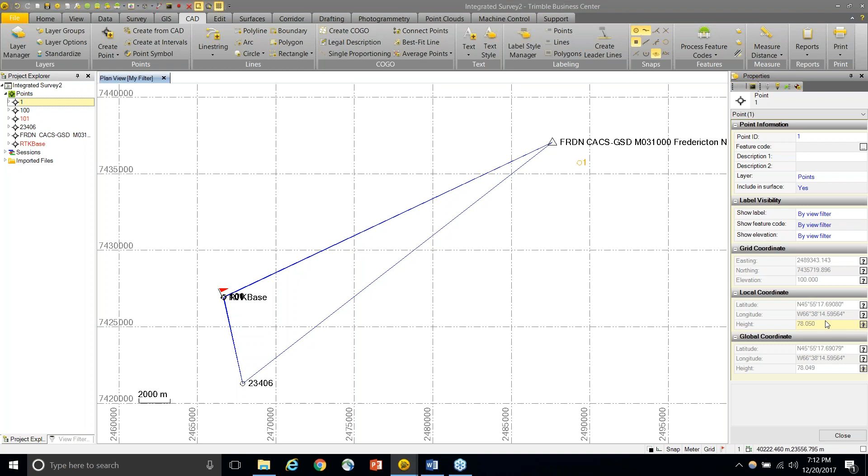And that creates a point, but notice if I select that point here on the left-hand side, it also has global and local coordinates, even though I only specified grid coordinates, and that is because we are currently working in a coordinate system that is tied to a horizontal and vertical datum. So that's one way, and I can do vice versa.

I can also add a global coordinate instead to this point, so I could right-click on the point, for instance, and hit add coordinate, and that's a nifty little tool. And I could also add this global coordinate to that as well, if necessary. And one other little tip for you before we finish up this question.

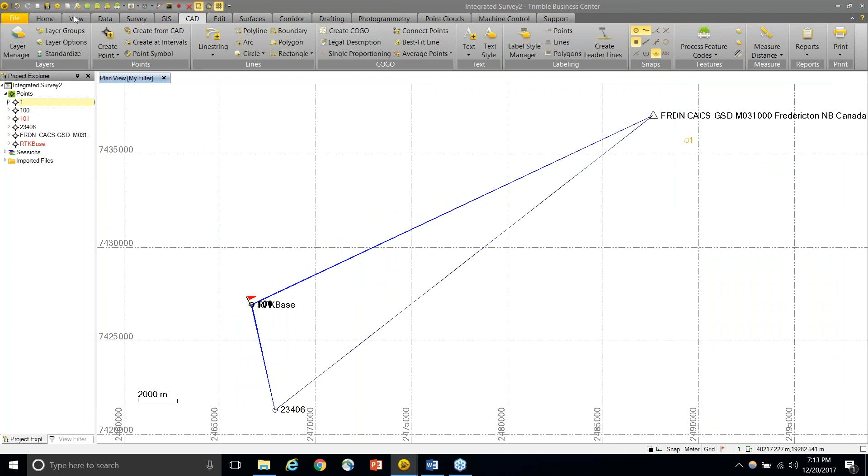You can view all of the local, global, and grid coordinates of your points by going to the point spreadsheet, which is under the View tab here, and hitting Points. Boom, there you've got a list of all the points in your drawing with the latitude, longitude, and height. Let's say I wanted to add the grid coordinates here.

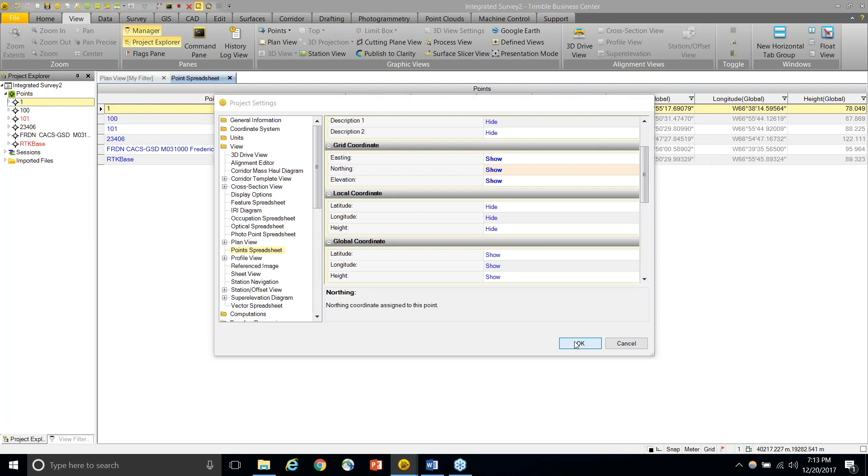I can go to the project settings, and we'll go to the left-hand side. There's a View tab, and under there, there's a point spreadsheet. And in that, we can change the settings for what's shown in the point spreadsheet. So if I scroll down, there's grid coordinates. So far they're set to hide, so we'll quickly change that to show. And now when we hit OK, it shows easting, northing, elevation, latitude, longitude, and height. So a lot of information for what you can use, and hopefully that answers the question.

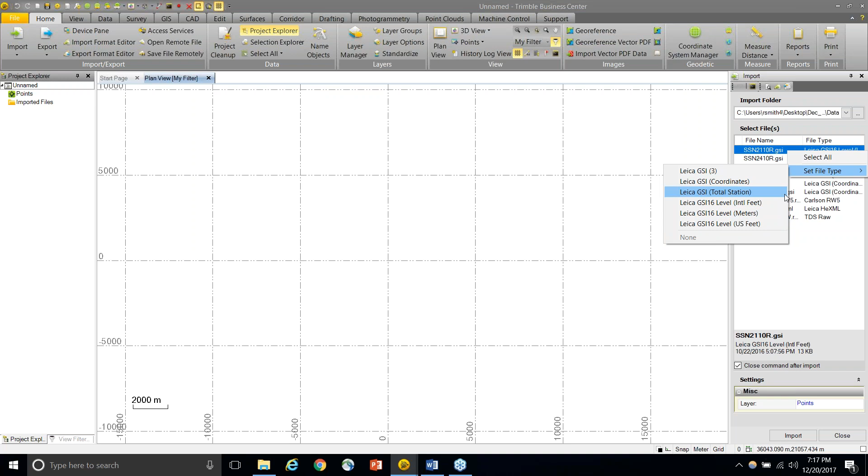So quick example of this, we'll import this Leica GSI total station data. And we'll hit import, and then we'll bring up all the total station data inside that. There we go. And voila. So we have a bunch of total station observations here. And like any data you would expect to get from a Trimble instrument, like from a job file or a JXL file, it has the same raw data properties.

So if we look at the right-hand side, for a total station observation, it's got the instrument height, as well as prism information and raw target height. Notice though that the prism constant isn't filled out. For this specific file format, and this is something to be aware of for anyone importing non-Trimble data into TBC, some raw data formats don't hold all of the information that a Trimble raw data file format can support.

So it's important to know that when importing that data into TBC, and this is where good field notes come into play, of knowing what your prism constants were that you used in the field, and you can input that data here and it will update. So be aware of that when importing data into TBC, because that has the potential to be an issue for you if you're missing raw data that you thought you might get from an instrument.

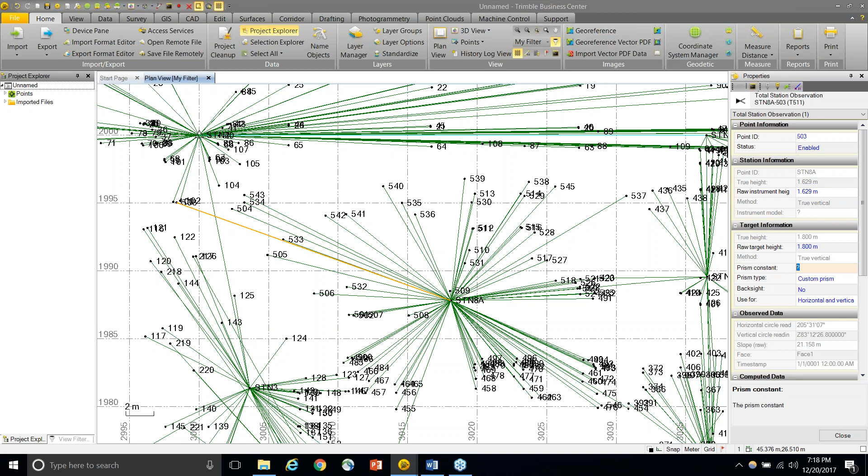So we've got all that, and you can use the same functionality that you would with any other Trimble data, such as total station traverse adjustment, as well as I'll show a little network adjustment here just for example's sake. So I'll fix a minimally constrained adjustment here with 1 point, and we'll quickly look here on the GSI file. There's several stations, and I'm just going to open up the properties and turn on the corrections so the adjustment will run. And we'll go adjust.

Oh, looks like I missed a setting. Bear with me, technical difficulties. Sea level correction. All right, now we have all of those, and adjust. And now we have an adjustment performed, and you see the error ellipses around the station point, so I could click on one of those. We'll look at station 8A and see the error, and I could go from there and do a network adjustment report or any other information.

So the important thing to take away from here is we have a lot of support for various different types of non-Trimble formats, such as a GSI. And with that data, be aware of what is held in that raw data format and what you should expect to be imported in TBC. But at the same time, this gives you a benefit of importing not only Trimble data, but all those other types of raw data into one project, so you can carry out all of those processing needs in one software package. So excellent.

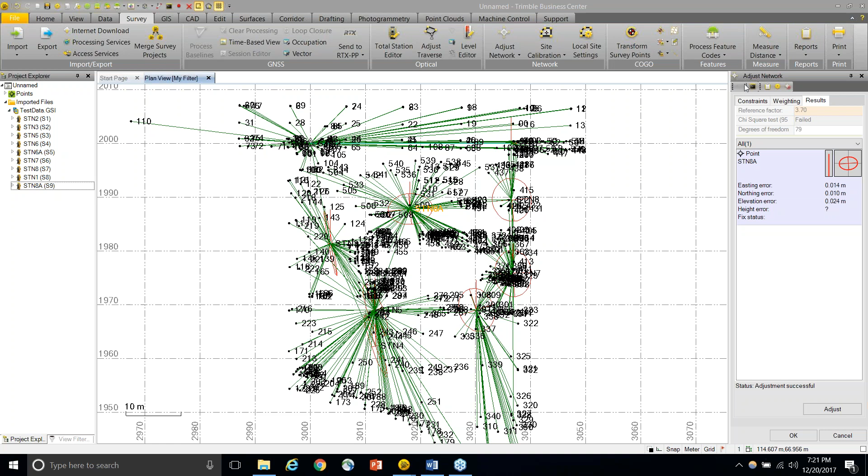So in addition to Trimble, what other softwares are you using in your day-to-day survey workflow? See if I can launch it here, Michael. Oh, you got it. So the five that we've identified: Autodesk, Bentley, Carlson, Microsurvey, or Leica. Please give us a response. We'd really appreciate it. We're always looking to become more interoperable with third-party software and hardware packages. Can they select more than one answer, Joe? Yeah, on this question, they can. Okay.

No questions, Riley. I think you didn't leave much to be asked. That was very good. Thank you, sir. No problem. Thanks for holding on here. Awesome. Thanks, guys. Thanks, Riley.

All right. Now that brings us to our first section of Two Truths and a Lie. The way this is going to work is one of us here, or Riley or Michael, will be reading a very short story or statement about TBC. Listen to all three, and then in the chat window, let us know what you think is the false statement. Please wait till all three of them are read. We had a little fun with it this morning. Hopefully you get a chuckle out of some of them. All right, first up, we're going to have Devin talk about Four Corners.

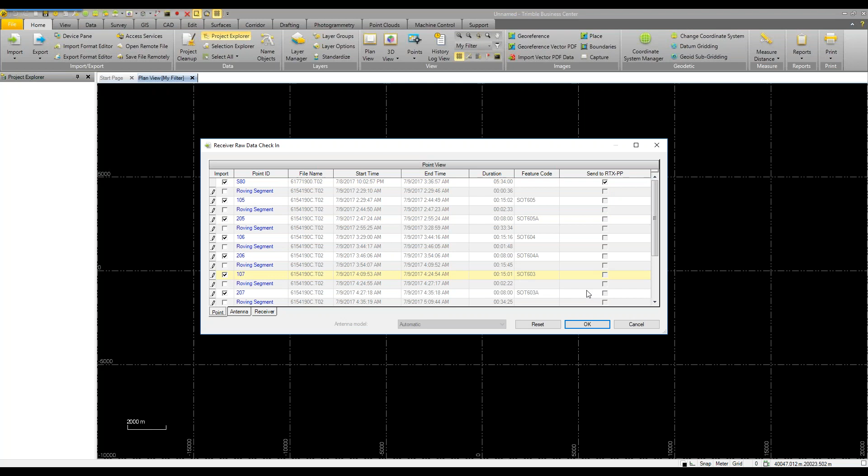Okay, so I'm going to start a new project in TBC. And I've got a few files here I need to import. Let's see. There it is. These two. Now, one of these is a base file. The other one is a rover file. And you can see here, the base was run for 5 hours, and I am going to send it to RTXPP to verify the position of the base.

Joe, you're not registered with RTXPP? Register now. This is a shortcut. It's a legit copy, I swear.

So what this is doing is basically sending a file similar to the OPUS service. It's sending it to a Trimble OPUS-like service called RTX post-processing. So in return, we are getting a solution back from the processing server. You could just drag that whole screen down, Terry. That's all right.

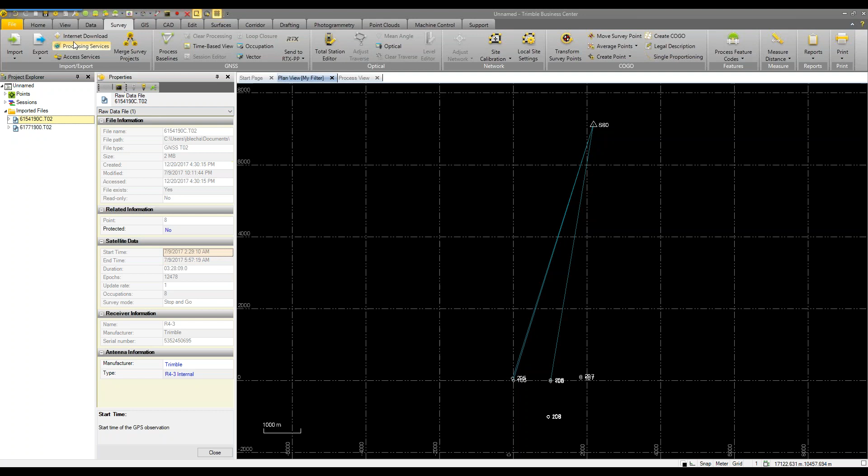In my years of experience with TBC, I've learned that having the properties pane next to the Project Explorer is a lot more useful than having it on the opposite side of the screen. There we go. So when I'm looking at something in the Project Explorer, the properties of it are right here, not on the other side of the screen. So we import our files, and this data was collected in July, so I'm going to import the final GPS.

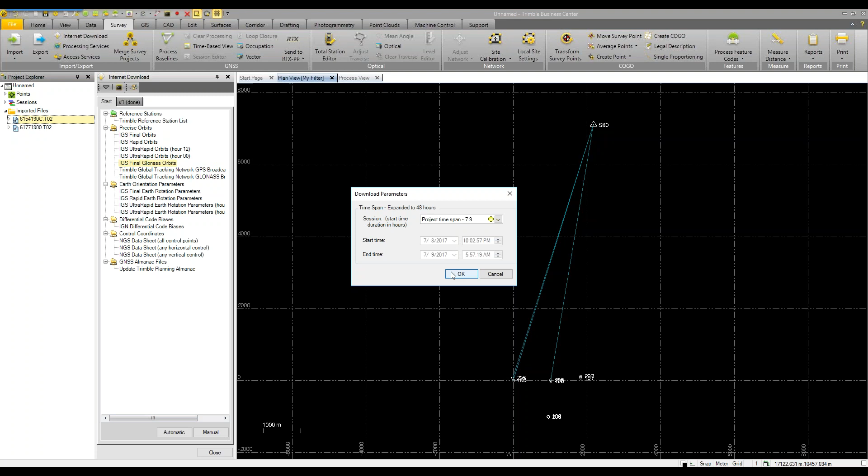The final GPS orbit and the GLONASS orbit. And just to make sure I have the most up-to-date data. And instead of having to click automatic, you can just double-click on this. What's the difference between automatic and manual, Terry? Manual will take you to the site, and I don't want to do that. It'll take you to the site, and you can manually find the files. Otherwise, it goes to the new server locations. You know, in TBC that's changed, and we had a patch to update them.

So now I imported the files. Here they are, the IGS and the IGL. IGS being GPS and L is the GLONASS. You get the properties on that, you can see it. So in my project settings, I want to check and see what we've got here.

How much time do I have? As much time as you need. Okay. You have that thing in... It's really low.

Okay, so I'm going to baseline processing, looking at general. My ephemeris type is automatic, so that means it's going to use the best ephemeris that I have. And right now, as you see, I've got the precise, so I'll just leave it at automatic, but I just want to make sure what it's set to. And really, all the default settings are going to be good enough for what we are doing. We have GPS and GLONASS in this.

So first, after importing all that, checking my settings, I'm going to go ahead and process the data and check the results. Now, this came from one of the TBC beta users. Submitted this question, so it's out of the country. So you can see all three of the vectors are floating in the high precision and horizontal vertical precision. So there's a problem, and somewhere, I'm not really quite sure where it is, but I was able to get these fixed, going through a number of processes to try to figure it out.

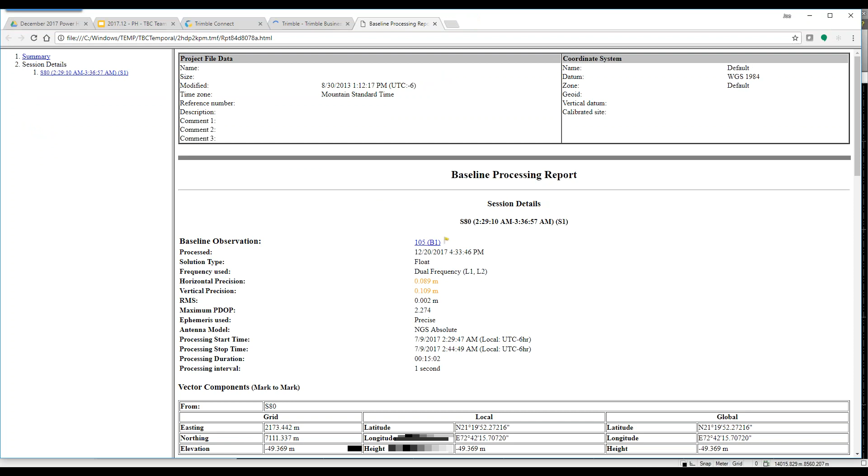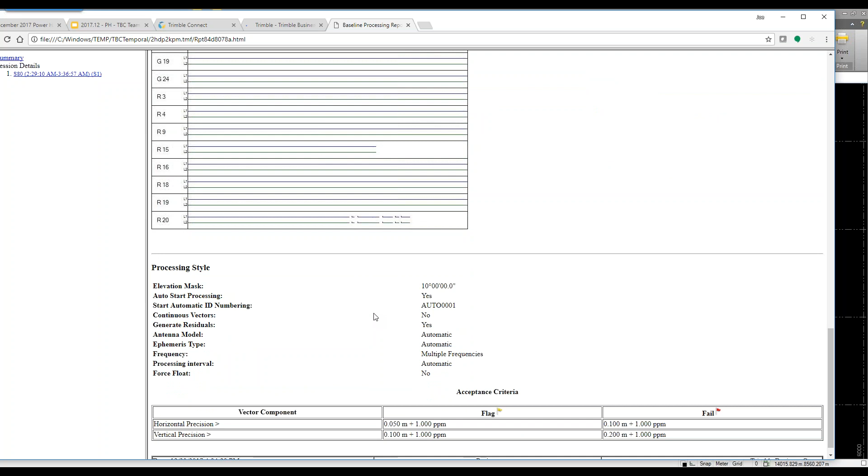So while I'm in here, let's look at just one of these points right now. And I'm going to select the point and then hit report. Hopefully you can see that. Okay. So we can see all this information of what information was used to process the data. It was float, so we didn't get any. We can see some breaks in the data on just one of the satellites. That really doesn't tell us much information, except that we do have a lot of satellites to look at. So let's minimize this. I'm going to just save that.

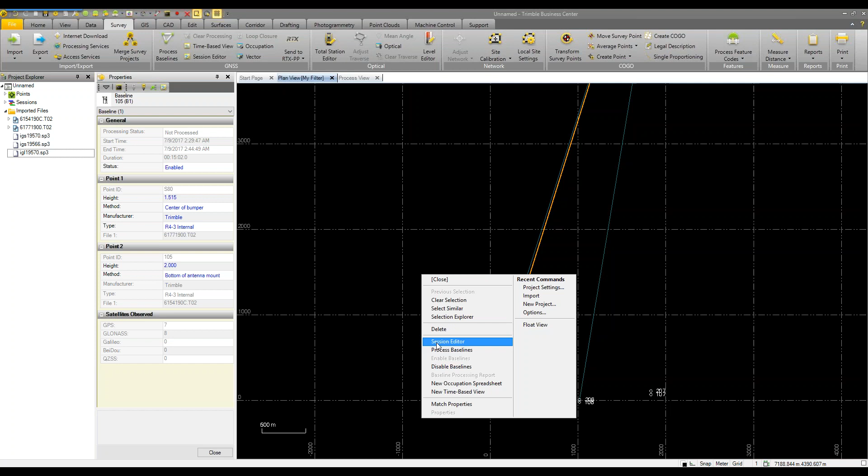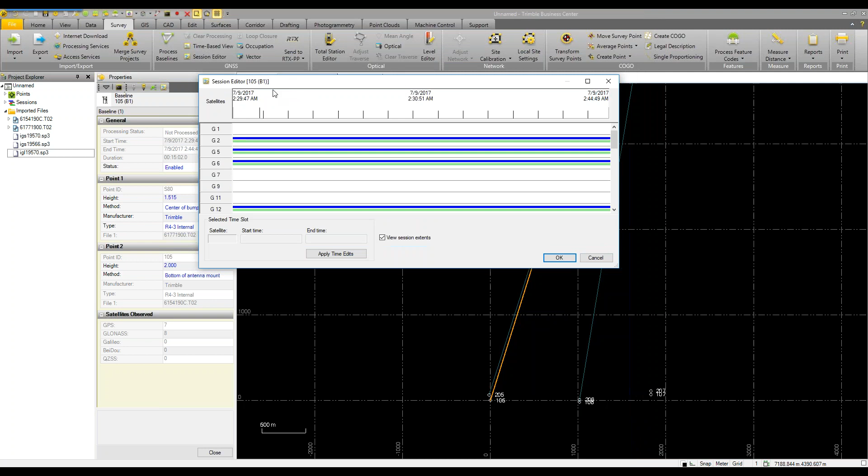And what I'm going to do, what point was that? Is that 105? I'm going to select that vector and look at the session editor. And you can see that because this is part of PPK data, and so here's the GPS and the GLONASS down here. You got to the session editor by right-clicking with the baseline selected, correct? Selected, correct. Okay. And this kind of reflects what we saw in the baseline processing report, that R20 has some missed data from one of the receivers. And if you look at this report, this is the session from point 105 to its vector B1.

Now, why isn't that other point showing? S80 is supposed to be up here. So what I want to do is to view the session extent. So you can see this, the blue receiver here is the one on top, the 105. The blue line represents data from the base receiver, and the green line represents data from the rover receiver.

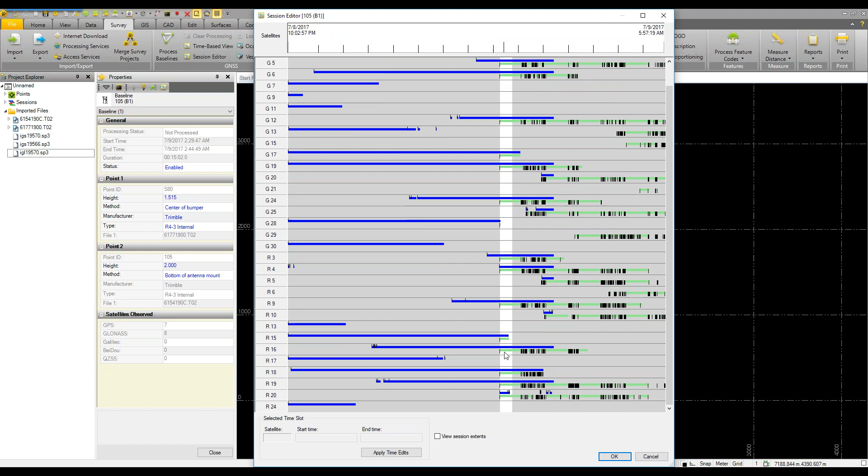And we can see this was the first session, first occupation in this PPK session, and when they moved, they probably put it in their truck and didn't maintain lock between this site and the next site, which is not the best thing to do. Once you get locked, you want to keep it locked on and not lay your antenna down. So right now we really don't have much to go on except that that one satellite was a little off.

So one of the things I'd like to try to do is to look at the elevation mask that I'm going to use for all these points. I'm going to go with 13 right now and just reprocess it. And it may make it worse, it may make it better. We don't know. But if this site had a lot of trees on the horizon or mountains, then raising this 13 degrees elevation mask is going to block out some of that information. And we're still floating, so let's take a look at this one again.

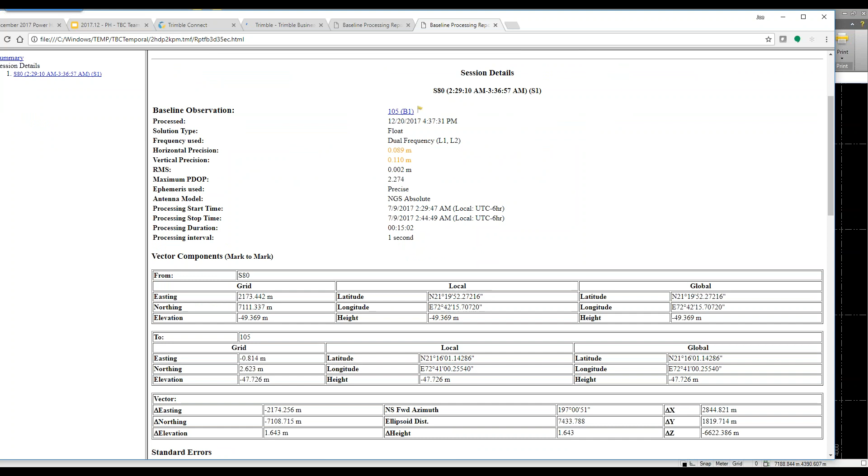So still the same numbers, just about, and still nothing much to go on. Another thing you can try, if that doesn't work, I'm going to go back to settings and change this to 13. Now, if you change this to 13, or to whatever, and then you import more data into your project and you keep it at 13, or you don't go back and change this, this is going to be held fixed for all of the future processing that you do as well. So if you want to go back to 10, you need to change it.

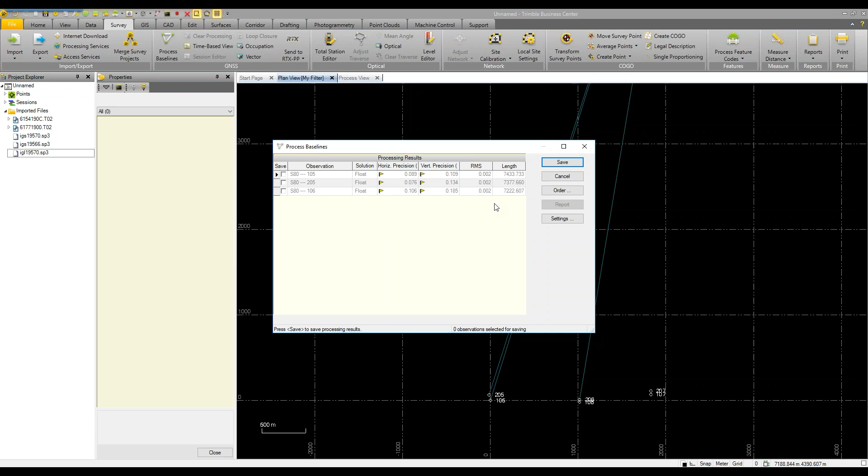I'm going to actually go to 8, and let's take a look at it. So by lowering the number, you're basically increasing the number of satellites the receiver was able to see? Correct. They're not going to be used until they get above 13, and now above 8. So we're actually using a little bit more data. And that might have had a better effect on this 205. It's down to 76, but still floating.

Another thing that I try when faced with these issues is going from multiple frequencies. Right now we have dual frequency. You saw that in the baseline processing report, the tracking summary at L1, L2, and if you didn't see that, I'll point it out next time I open it. But I will process L1 only. Sometimes, since the L2 frequency is a lower frequency, the length of the signal is a little bit longer, and it's not going to penetrate the trees as well as L1 does. So I'm going to do L1 only and see what happens.

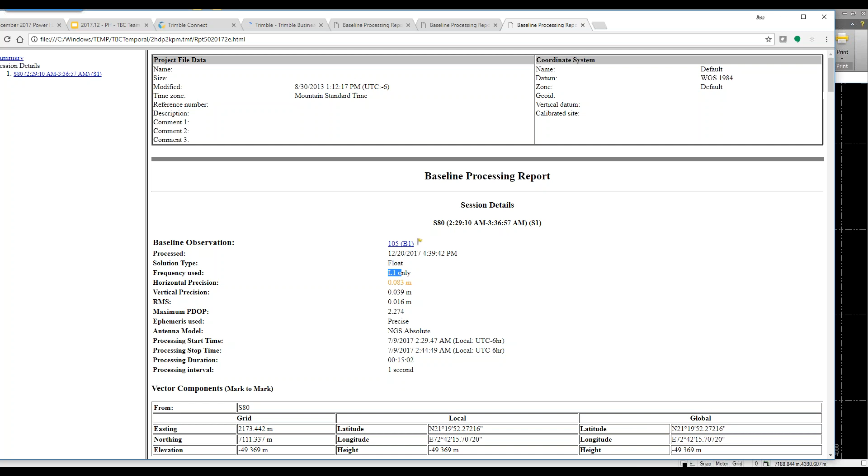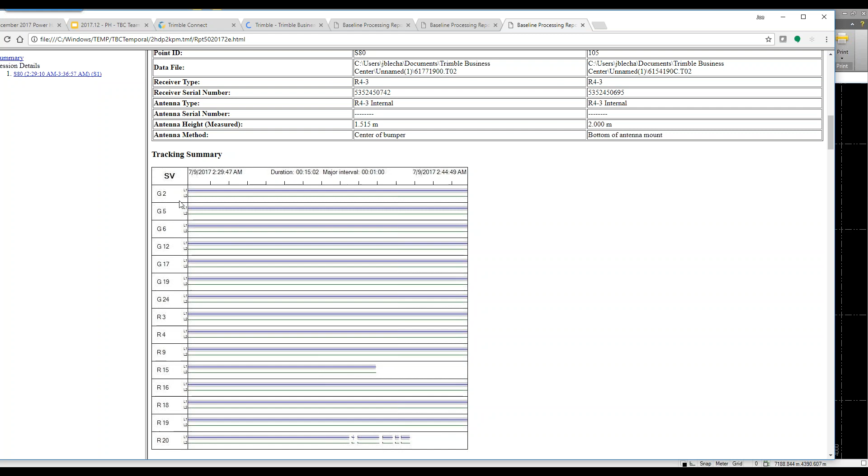Okay, so now we start to see, we get some residuals because we have a little bit better results maybe, and we're going to look and see what's happening within the results, within the tracking. Now we're looking for trends. Maybe during the middle of the session it was blown over, or maybe at the beginning or the end something happened, it got off level. And if you're looking at it, you can quickly pick out something, and I'm not sure what caused this. But we can do something about it and see if it helps our processing. So let's take a look at this one. This drop off is about the same in every file.

And if we look, this is 238.48. So at 238 to, we'll say 240, 238 to 240. I'm going to disable that part of the session, and that was for 105. I'm going to go to session editor. I'm going to look at the top. These numbers are going to move. And 238 right here. I'm going to click and drag it all the way down to this. Let's see if I get everything. Yes, I did. Now I need to fine tune that. So it was 238 to 240.

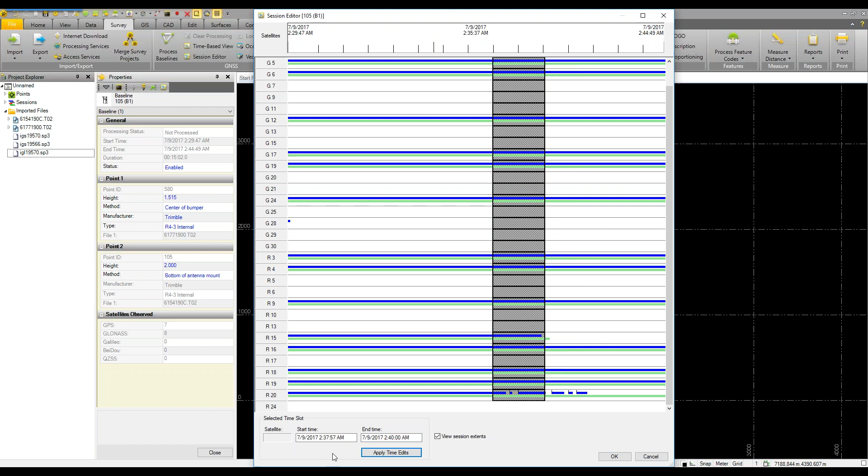So I'll go 0, delete, 0. And now when I apply this, the end of this will move back some. Where's my apply button? There we go. Okay, that's close enough to 238. So we'll okay that. But now we will reprocess again. So we can see that had no positive effect at all, but let's look at the report and see what's going on. This made it a lot worse. I need to go back to dual frequency.

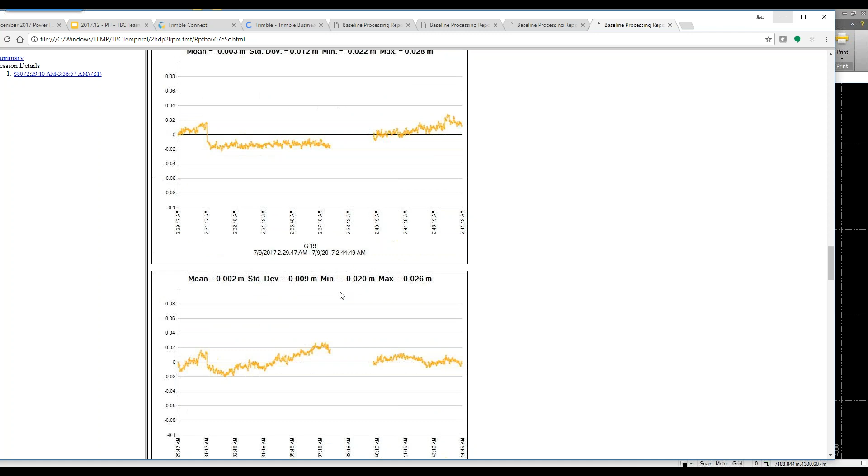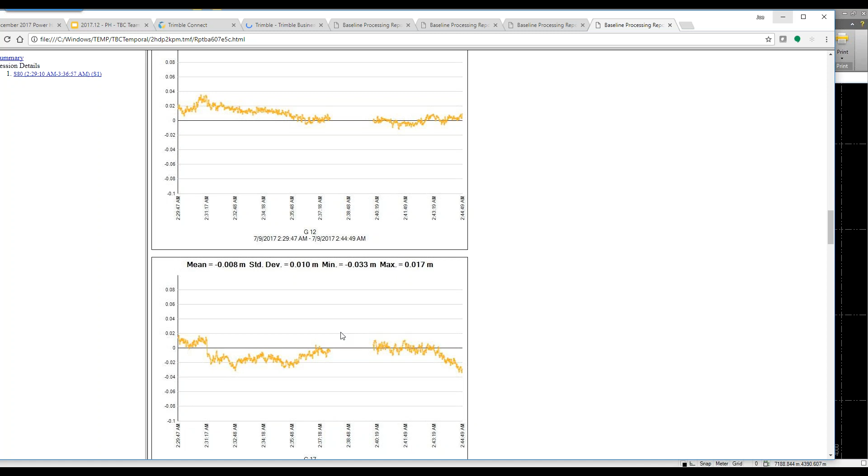Let me do that. So we can see this gap in the data that I blocked out. Yeah, so those spikes are gone. Yeah, that spike in the center is gone. I'm wondering, did it get blown over in some way, and depending on where the satellites were, if the tripod or the range pole got moved in one direction, it's going to lengthen it in one way and shorten it in another. That's why you see some up, some down. Let me go back to the settings and go back to processing and say multiple frequencies. Process again.

Like an intense movie, we keep waiting for the numbers to go down. It's a cliffhanger.

Do you make it fixed or not? Eventually. Okay, we got 2 fixed right here. Yeah. Still with flags, but they are fixed. Now this is the dual processor, dual frequencies. So that's good. We're going to save these 2. Well, actually, because they're in PPK, you can save them, but next time I process, it's going to reprocess these 2 anyway. What were you going to say?

Let's speed it up. Move it along.

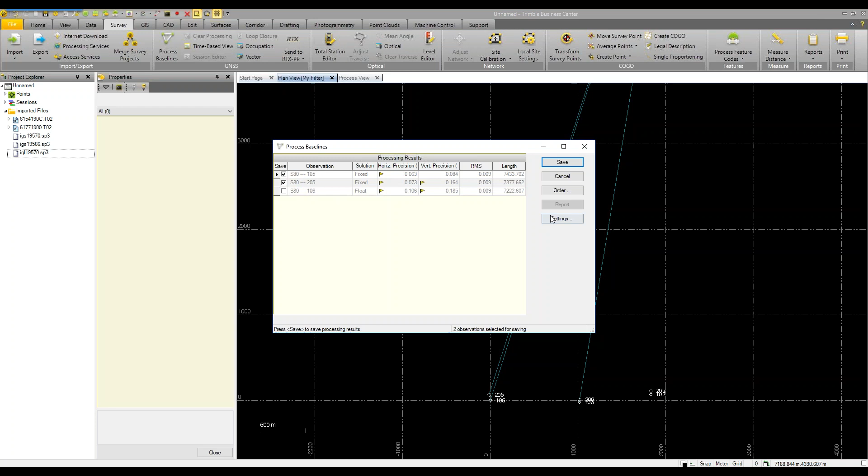Okay. So what I want to do here, one thing real quick, is check out and see if this point 105 did in fact move during the occupation. So I'm going to go to the occupation of 105, and this button up here, it says force kinematic. It's going to force it to be a kinematic processing, and I will process the baselines again.

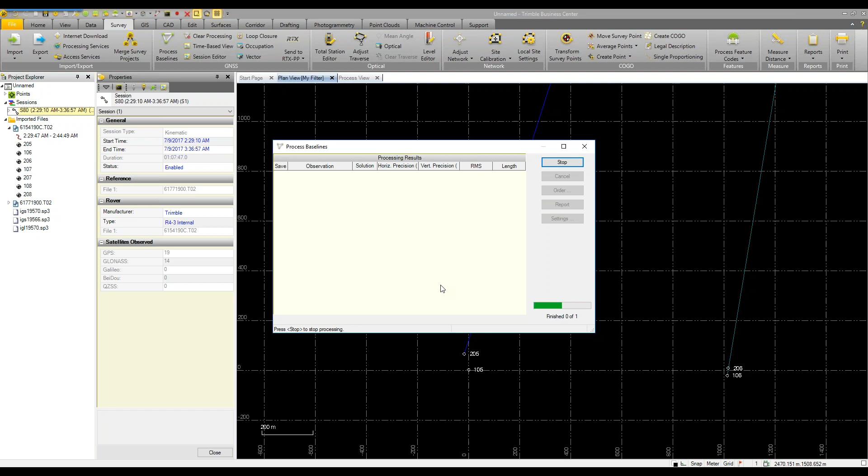So this is kind of a trial and error process. The processor is, sorry. The baseline disappeared. Yeah. The processor does such a good job on weeding out good and bad data. A lot of times you can manipulate these settings a bit, and you don't see much improvement in the results at all. So then you got to get creative.

So what I did here is I processed 105 as a trajectory, and you can see here that something did happen. You can't tell if it's the beginning or the end of the file, but at this point right here, it must have got blown over somehow, somewhere. Or is that my blocking out of the data?

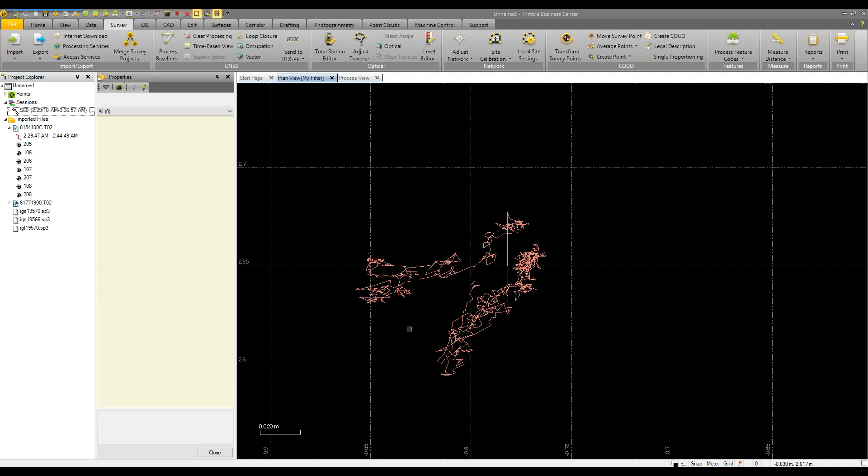Anyway, so this is a good way to view your data, to see if maybe they left the receiver on when they moved to this site, and it's got a lot of extra data that you don't really need. You can kind of use the scale of this to determine what size this is. But also remember, in this view it's 2D, but there is a 3D component of that.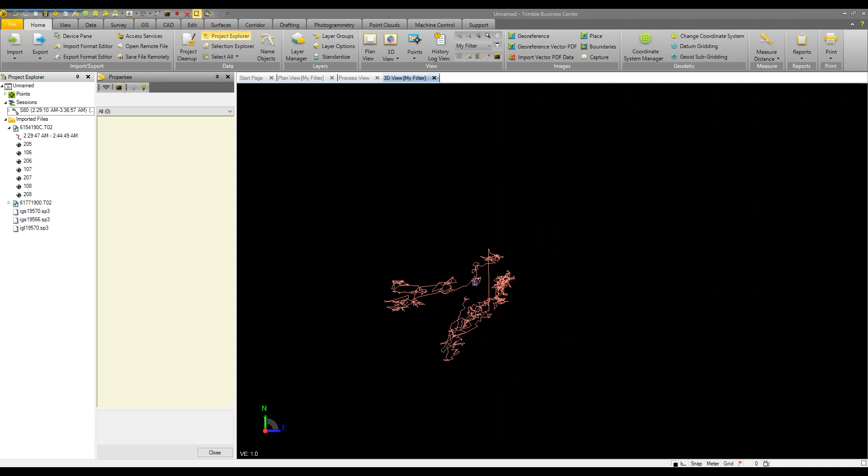And if I window into it, so we can see it, then we can flip it on its side and see how this looks in the vertical. And we'll go here, and then we get a measure, just the top and the bottom, see what kind of distance this is. Measure. So we're looking at 2 decimeters in the vertical. Not too good.

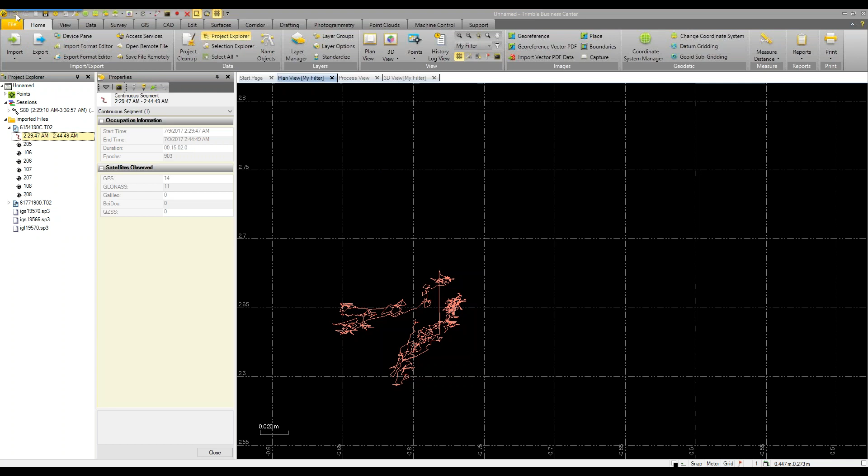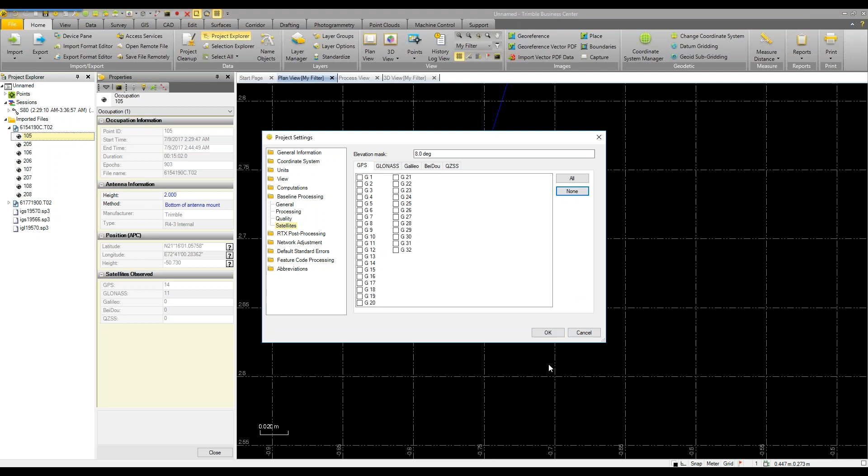There we go. Okay, so the last thing I'll show you is when I finally figured out what was going on. You can turn off all the GLONASS satellites and process it with GPS only, but in this case, by turning off all the GPS and processing the baselines with GLONASS only, I believe we were able to get fixed results on all the sessions, all the occupations.

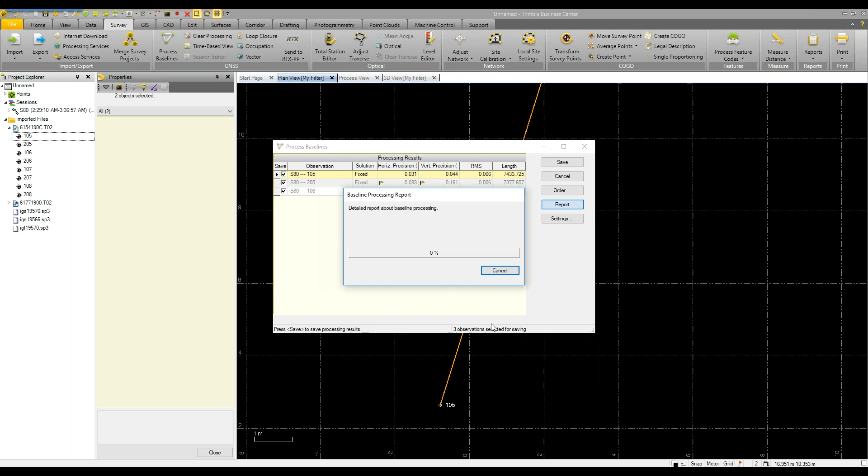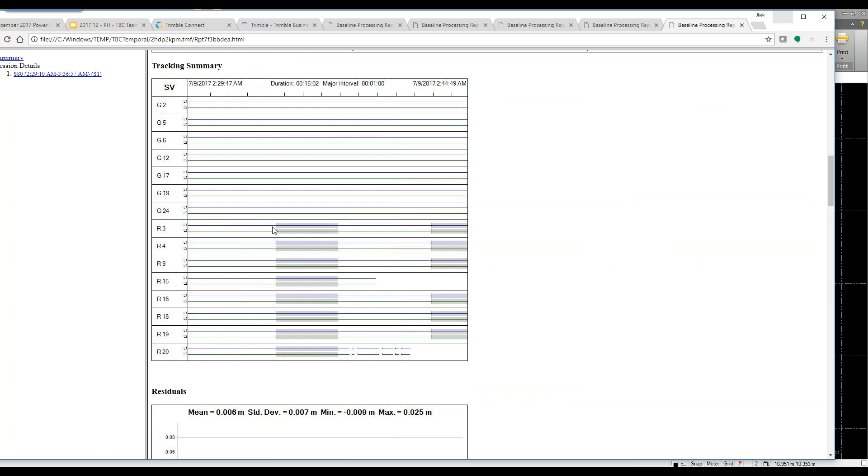Fix. A little bit high, but at least we do get some fixed results where we had nothing before. And I turned GPS off. I still have this data gap here. There's something in here that caused it not to get fixed ambiguities until this part of the file. So I'm not quite sure what happened with this, but anyway, we did get fixed results. Maybe not ideal, but manipulating these settings, you can see how it can be better.

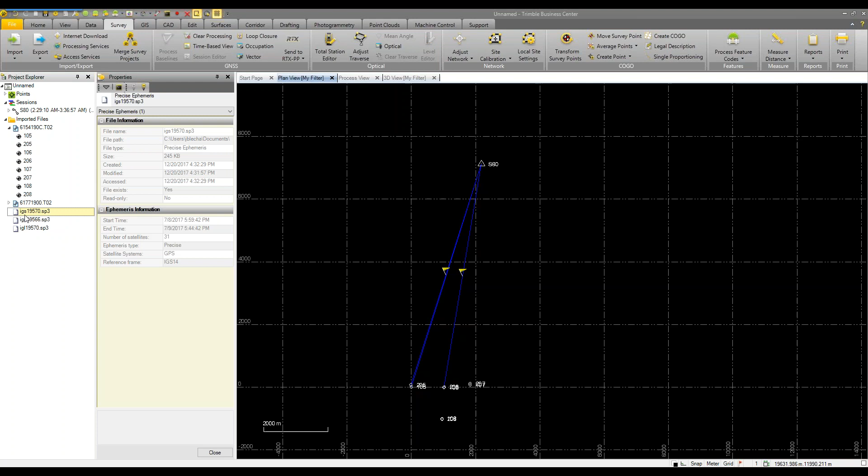And this is actually a good data set to showcase not only the capabilities of TBC, but it also showcases that it's not a magic wand. You know, the methods and the approaches and what happened in the field, whether it was accidental or a mistake or an error, they can be tweaked and adjusted in TBC, but data collection and proper procedures still do matter. So I kind of like going through this data set and trying a couple of things here with this demo,

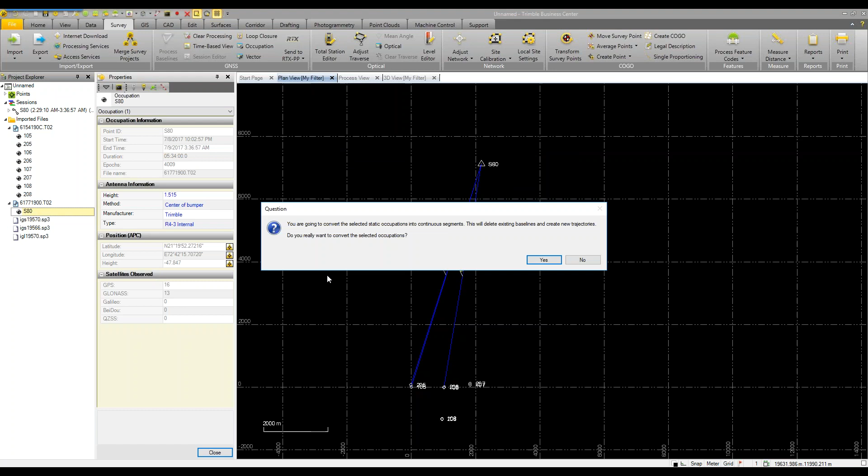Terry. So once you saw me do what I did with 105, you can also do that with the base station. If you suspect the base station might have moved, you can go to the base file, get the properties and have it do the same thing, and then download from the closest CORS station. I think in this case, I couldn't get any other data, and this was 1,100 kilometers away, so that's quite far. But this was a 5-hour occupation on S80, so that was enough to process it.

But I couldn't find an external source to process it. So in that situation, Terry, when you identify the trajectory and we established that the receiver actually moved 20 centimeters, you would basically identify the time at which it starts moving from the trajectory timestamp, and then you would delete, or you would limit in the baseline editor to just that time?

Yeah, what I would do, I would look at that, and I would have to go back to the settings over here. Let me turn everything on. I would have to go back to the general tab, I believe it is, and tell it to store the continuous as a trajectory, say no. And what that's going to do,

it's going to put a vector at every epoch that was recorded, and then you can review those vectors in the vector spreadsheet and find what time it was at that vector that the receiver moved, and then you know back in Session Editor which part of the occupation to block out. So you will only get this part of the occupation that did not move. So, and that's another step.

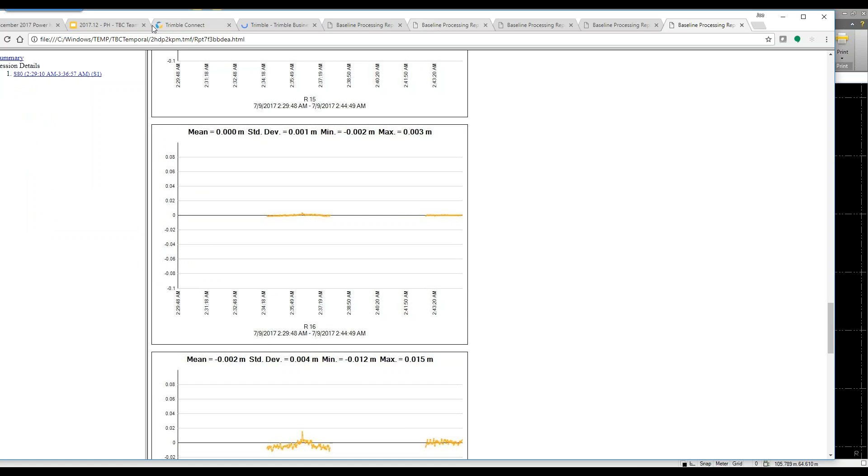Yeah, there were two questions there. Terry rolled into the next one as well: during a long static session, I accidentally kicked the tripod and the receiver moved slightly. The static file still imports into TBC, but I know the position needs to be adjusted. Is there a remedy in TBC? And that's what Terry kind of touched on at the end.

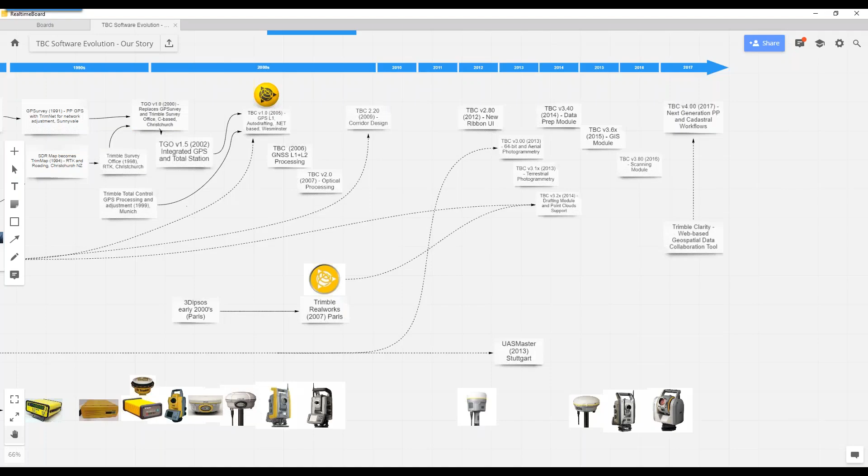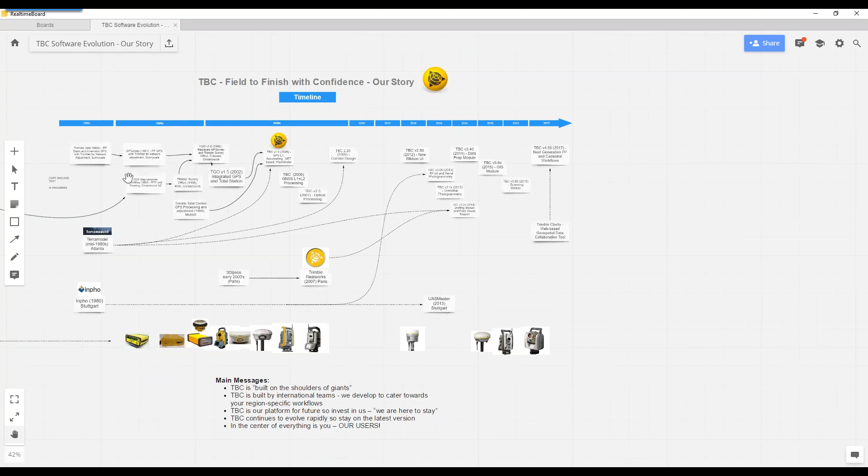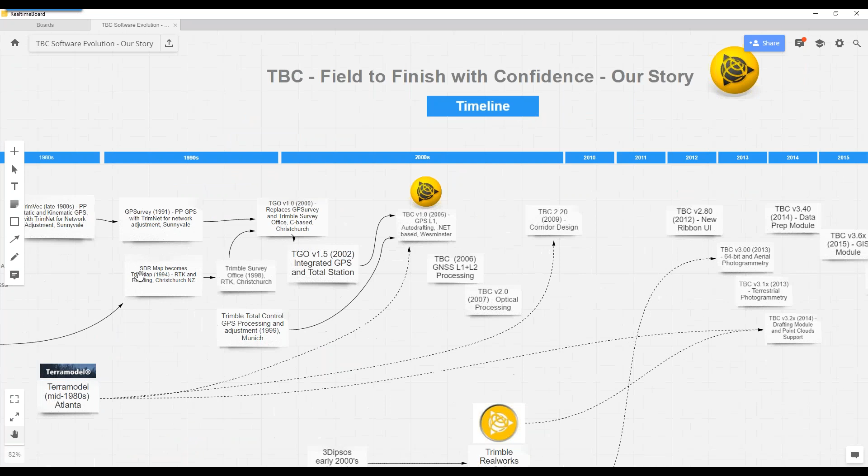All right, so I will hand the mouse over to Boris, and he's going to show you a little bit on TBC history. So it felt not right to tell about the next steps or directions of where TBC is going without touching some of the places we've been, and how we came to the story of field to finish with confidence, and why we've been able to develop as quickly as you saw us develop in the last 4 or 5 years. But I'm going to start by saying that the TBC software story, or Trimble Office software story, started in the

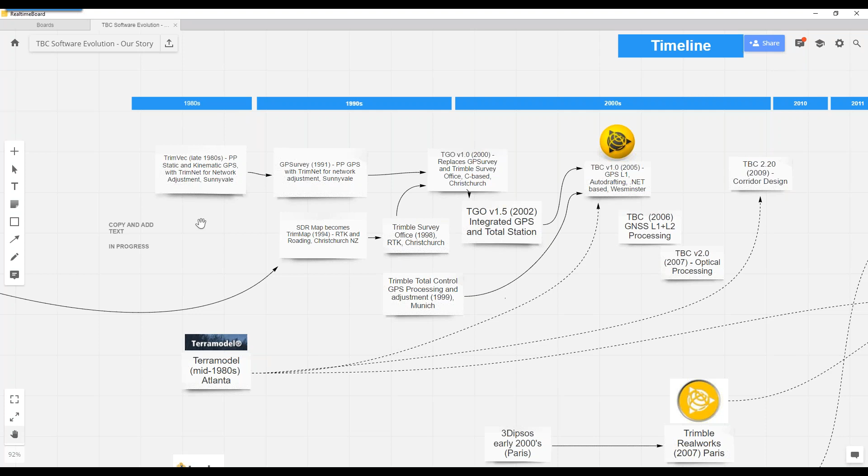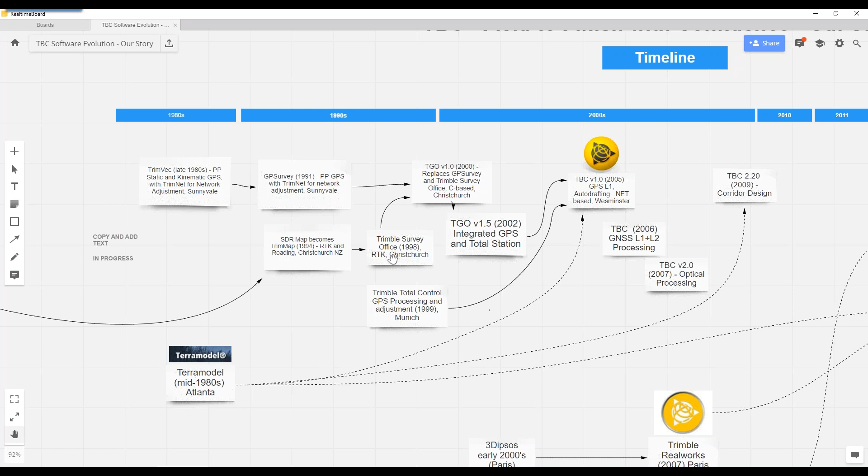1980s, and we had a software called TrimVec, which then later became GPSurvey, both having TrimNet as the adjustment module. We also then acquired a company in New Zealand, and that brought SDR Map, that later became TrimMap software. TrimMap didn't really straight become Trimble Survey Office, but that team worked on the first Windows-based Office software, and that was Trimble Survey Office, and both of them got converted into Trimble Geomatics Office. And that was actually my first experience with Trimble software in the early 2000s.

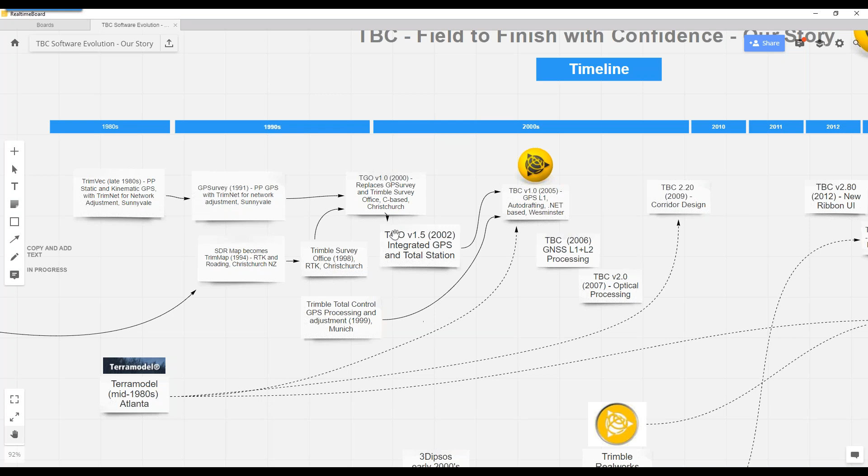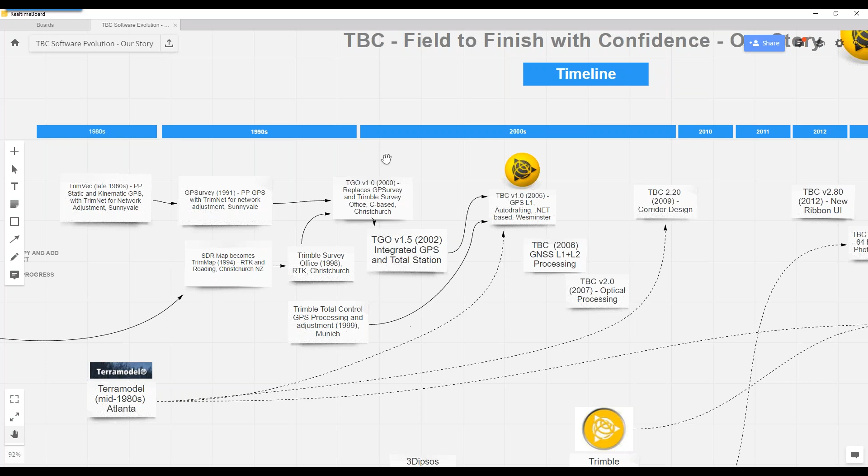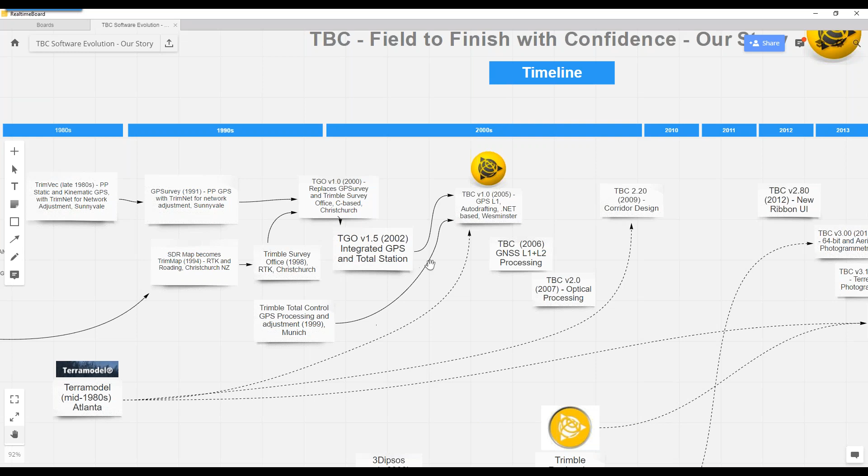So in the early 2000s, we decided, let's really invest into a platform that's going to have longevity, that we'll all be able to contribute to from various Trimble groups. And that platform name was actually Symphony, and it started about 2001, 2002. And the first application released on top of that platform was Trimble Business Center in 2005. So that's why you see such a strong contribution, both from the survey perspective, but also from the surface creation, corridor, drafting perspective that was introduced by the TerraModel team. So the TBC feature coding concepts came really from that. A lot of those TerraModel concepts were revived then.

So just a show of hands, who here was on the TBC team before the first release? That's not fair. Okay, just checking. Yeah.

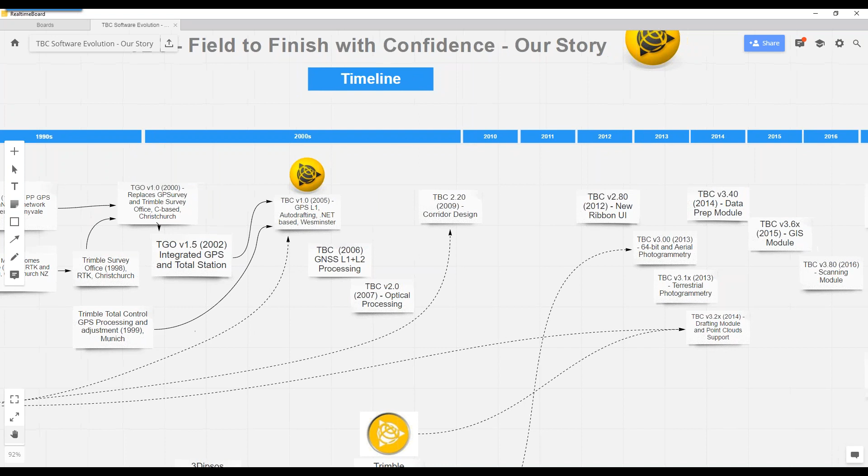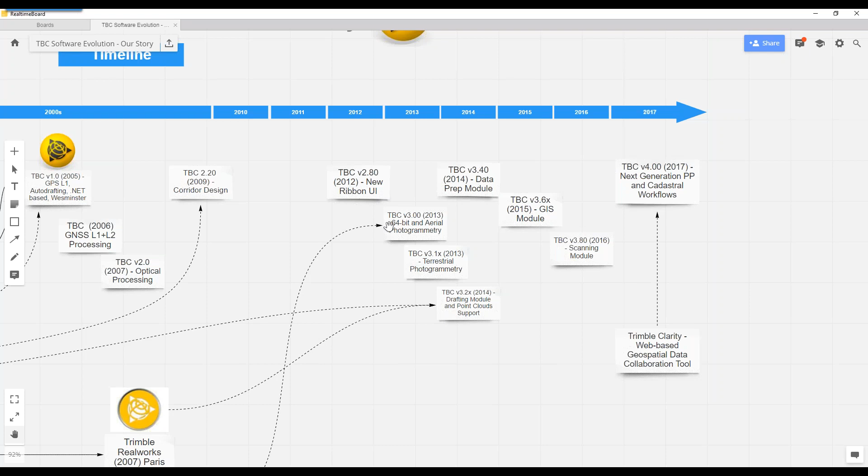So we then started adding GNSS L1, L2. In 2007, we introduced optical processing in TBC, adding corridor design in 2009. Then in 2012, you probably remember the painful transition from a bunch of icons in the software to the ribbon interface. And 3.0 was the introduction into the modern computation space, where the computation engines of the computers were not as big of a concern as 10 years before that.

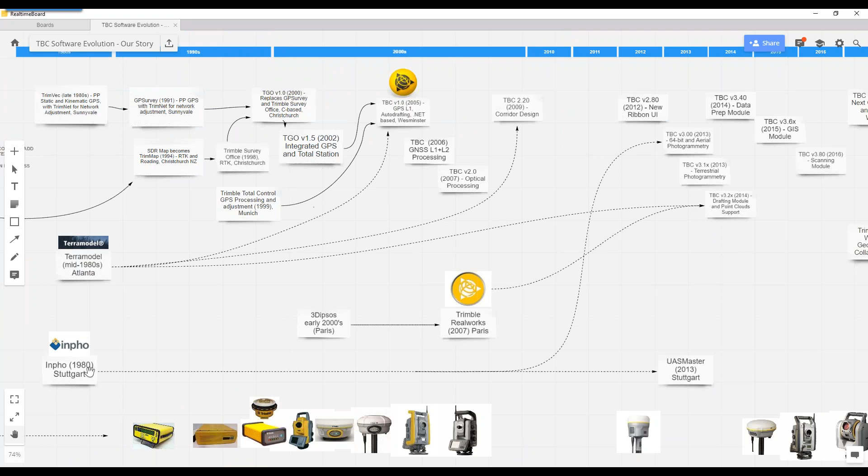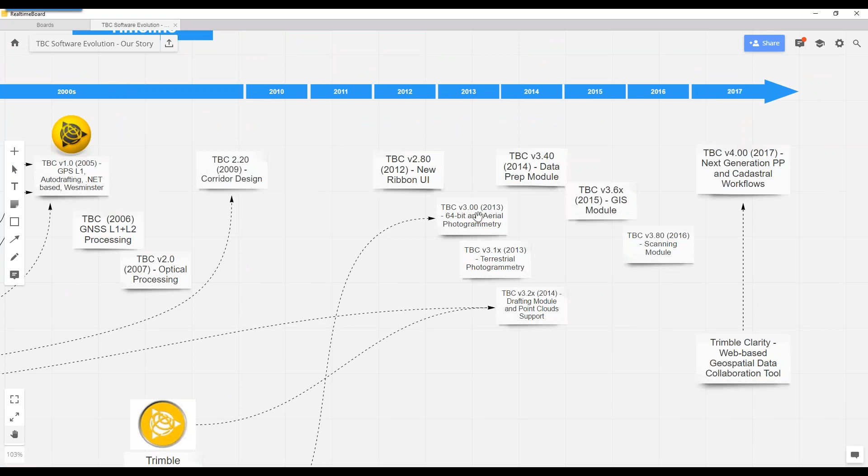So the 64-bit processing, we introduced aerial photogrammetry, which actually comes from another software family in Trimble called Inpho, which started in the early 1980s in Stuttgart. So we introduced that photogrammetry. So the UASMaster software and TBC were leveraging the same engine to process data from the UAV devices here in TBC 3.0. We added terrestrial photogrammetry capabilities to take advantage of our Trimble Vision.

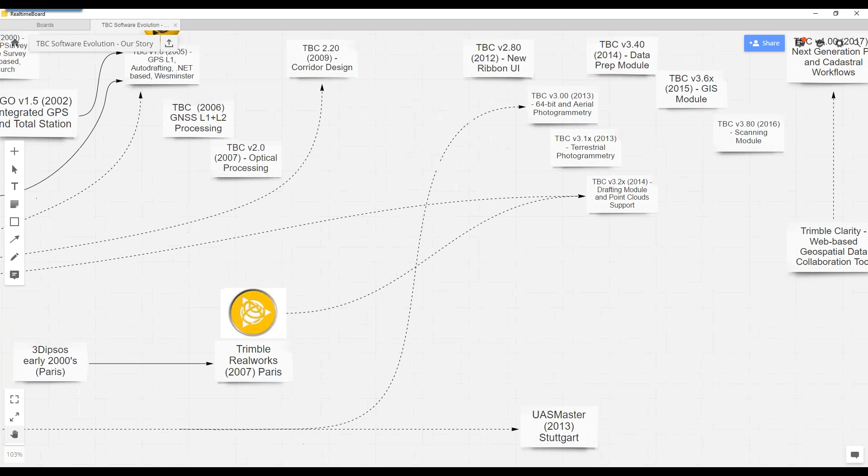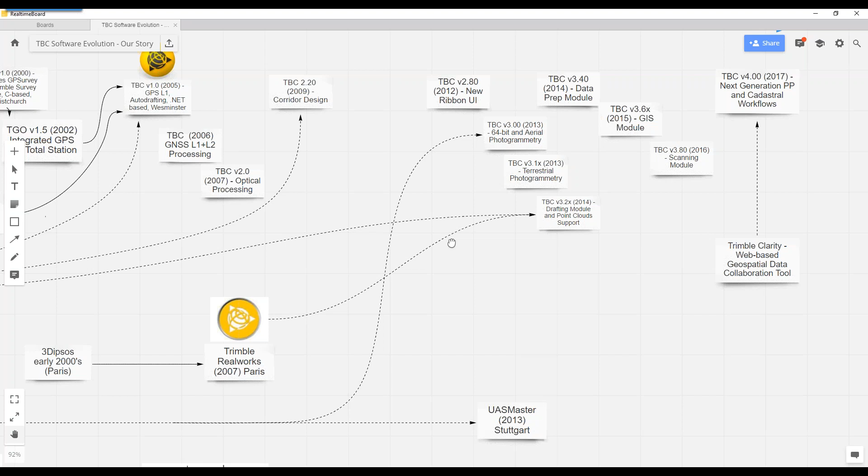And then in TBC 3.20, we added point cloud support from another software family in Trimble called Trimble RealWorks software. So the same engine runs behind Trimble RealWorks and TBC. That also allows us a lot of cross-platform collaboration. So all the capabilities we build on top of TBC, we can leverage in RealWorks and vice versa. And also the Terramodel concepts came back strongly with the drafting module introduction. So concepts like DynaViews and sheets were introduced through the drafting module.

We added data prep in 2014, GIS module in 2015 by contribution from some of our Pathfinder Office software team members, which I actually failed to highlight in these graphics. Then with the release of SX10, we expanded some of that Paris team contribution from Trimble RealWorks and the scanning module, adding more analytics, like automatic ground extraction, classification, registration tools to TBC.

And then in 2017, as Joe said, we reinvigorated that cadastral focus. We did things like create COGO commands. We computed the misclosures. We added a lot of proportioning and a lot of additional survey software tools. We also started leveraging the web-based platforms a little bit more. So Trimble Clarity that we just released is a good example of some of our future directions, using a cloud-based service as a collaboration mechanism to communicate more effectively with other trades in our ecosystem.

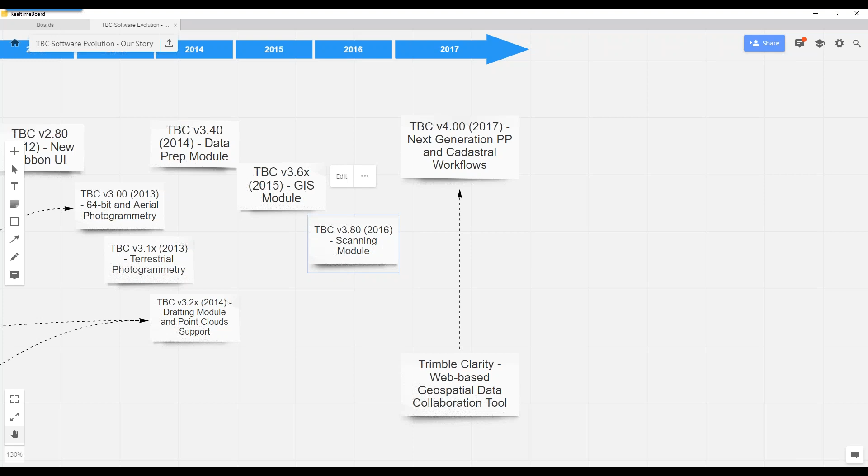So I hope this was interesting from the perspective of how we got to the point where we are today. And now when I look at where we are going from this point, Joe, which one was the?

And I just want to have a disclaimer here. This is an action plan. This is not a commitment. Trimble is a publicly traded company, but we wanted to give you a flavor of where we are thinking TBC should go. And we also look forward to getting some of your feedback on this.

But we really want to hammer on that message of ours that we are survey software primarily. We are not a design CAD. We are not an enterprise GIS. We are software for surveyors primarily, focusing on field to finish workflows with confidence for surveyors.

So in context of bigger work chunks where we're heading, in data integration, we are really proud that we can say we have the ability to bring, as Riley said, level, total station, GNSS, point clouds, aerial photogrammetry, terrestrial photogrammetry, all of that data mashed into a single project. But we see opportunities for additional data types such as mobile mapping, GIS, and through the power hours, we got feedback that we could probably add a little bit more hydro data in there. So those are some of the immediate things that we are looking at the moment.

In terms of confidence and that survey adjustment, survey core, we see a lot of ability to improve in the COGO and some of the traversing workflows. We can fine tune to make those a little bit better. It's interesting that we are perceived as a GPS package, but TBC I would argue is stronger in optical than it is in GPS. So I'll let you judge that.

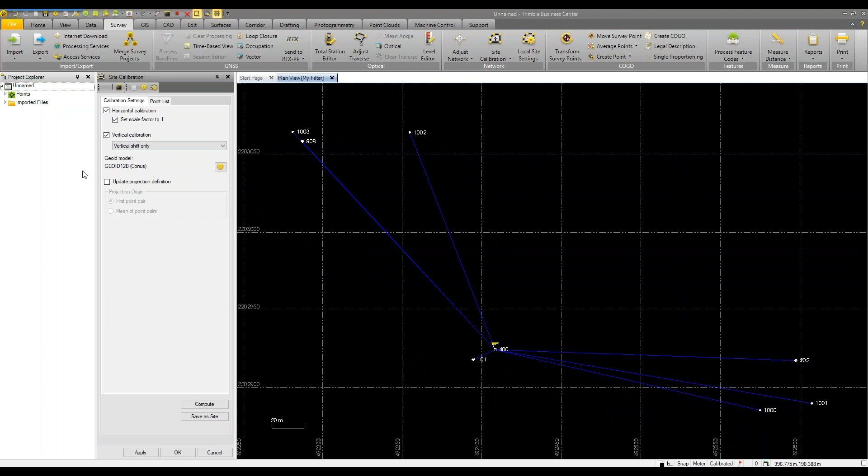One thing you'll note that is different here is this update projection definition. This is something you might want to use if you're dealing with some grid coordinates. If your GNSS measured points are in like a state plane projection or one in the UTM zone, you'll have coordinates in the millions. And if you're changing it to a system where your coordinates are in the thousands, then you're going to want to update your projection definition to something in that location close to that new coordinate system.

Because of that distortion moving from somewhere way far out to something local. Yeah, exactly. You want to be in that area, and that's going to bring your scale factor into a normalized sort of thing. Okay. For this project, it's not something we need to worry about.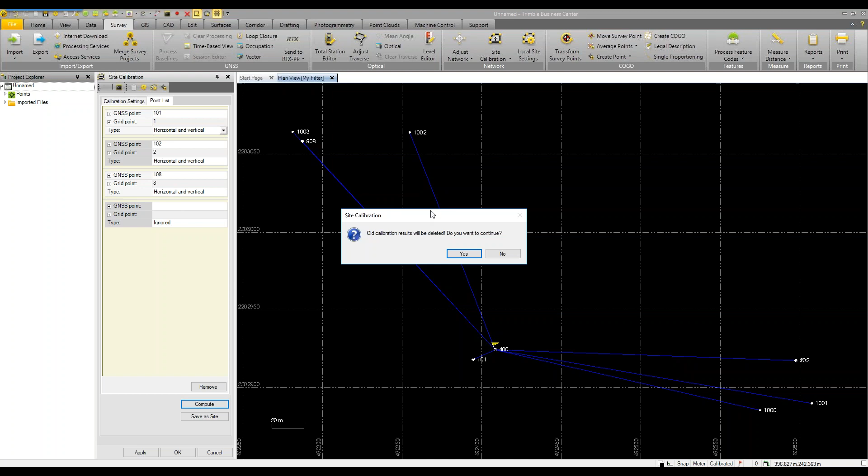And we can go ahead and look at our point list, exactly the same as the one we did in Trimble Access. We got our point pairs. We can use them for horizontal, vertical, and the same options, same as they were. We'll go ahead and compute this. And it says it's going to delete our old calibration. That's fine. It should be the exact same when we compute it, and we can actually see the results.

We can confirm that they are exactly the same between the two softwares. So this is what I was talking about, where you have those kind of extra QA/QC tools. You have these graphs that give you the residuals for each point. They give you a direction. You can see, maybe if they're all facing the same way, then you might have some sort of systematic error you might have to deal with.

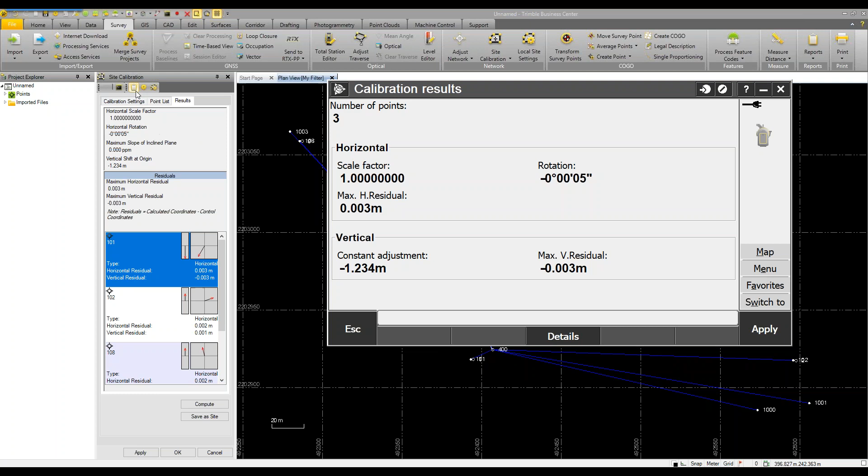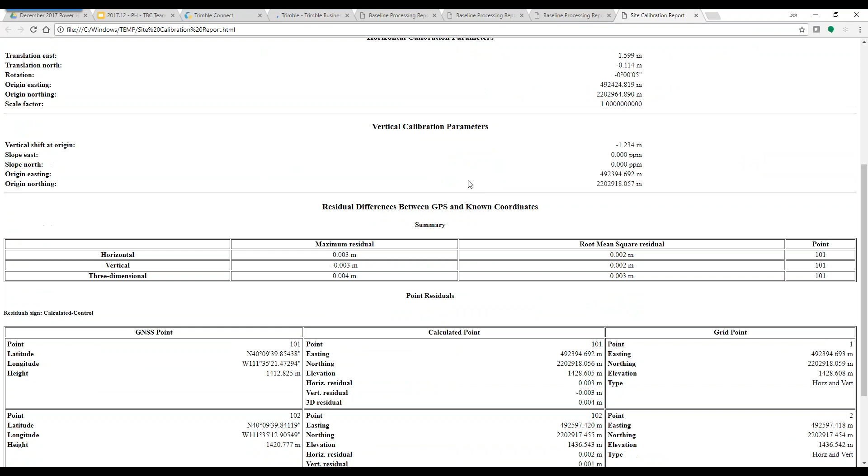And they also have a report. Click on that button, it'll bring up a site calibration report that has kind of all the information you might ever need: coordinate systems, local site settings, all your translations, residuals, and calculated points.

So yeah, to summarize the original question, they're both fundamentally the same. You can always transfer between. I can take this calibration and transfer back to Trimble Access. But TBC does probably give you a few extra tools. It might be a bit easier to do it in the office. And yeah, that's all I have.

Sweet. Thanks, Adam.

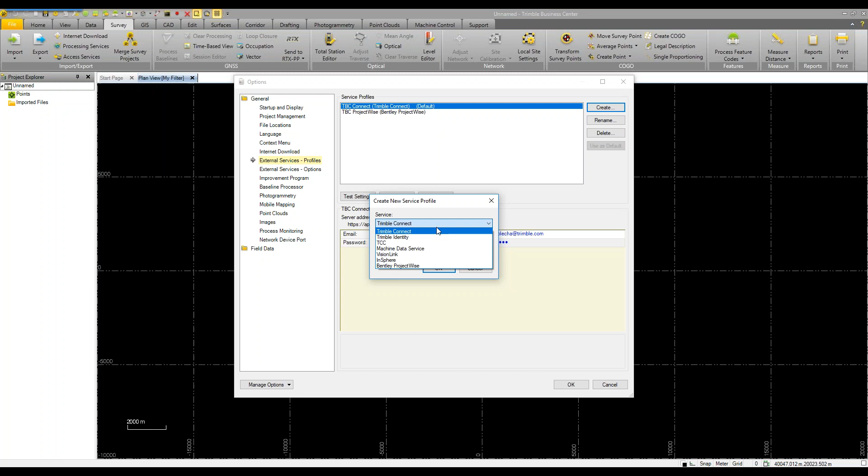However, please do note that we've got a handful of different external services that we do support. I saw in the poll a little bit earlier that Joe deployed that we've got quite a few Bentley users. And if you guys are familiar with ProjectWise, that is their web collaboration platform, and we do interface with that as well. So everything that I'm about to show you is directly applicable to Bentley ProjectWise as well. I could just show you here real quick what that looks like.

So here it's just going to ask you for a handful of credentials, and this is something that you would get from your ProjectWise admin. So we just wanted to breeze over that real quick. We're going to do a Connect. I'm going to call this Devin's Connect, and I'm going to set it as the default. Again, we're just creating this profile.

It's going to ask me for my email and password. And the email and password is tied to your TID, so this would be set up already in advance. There are links here to be able to create a TID, which is a free service. Not everybody knows what TID is, Trimble ID essentially. So we try to standardize. The idea is to have a single Trimble login for everything. Finally. Yeah. So you don't have to memorize 10 different passwords and such.

So if you go to Trimble Connect online, if you just Google Trimble Connect, you can sign up for free, and basically we just need your email and password to connect to your Connect account. Yep. So I just punched in my credentials, and I'll press sign in here, and it is actually verifying and checking into Trimble Connect, and now I am effectively synced with Trimble Connect. Here you can see up at the top that I am signed in. So we'll go ahead and exit here.

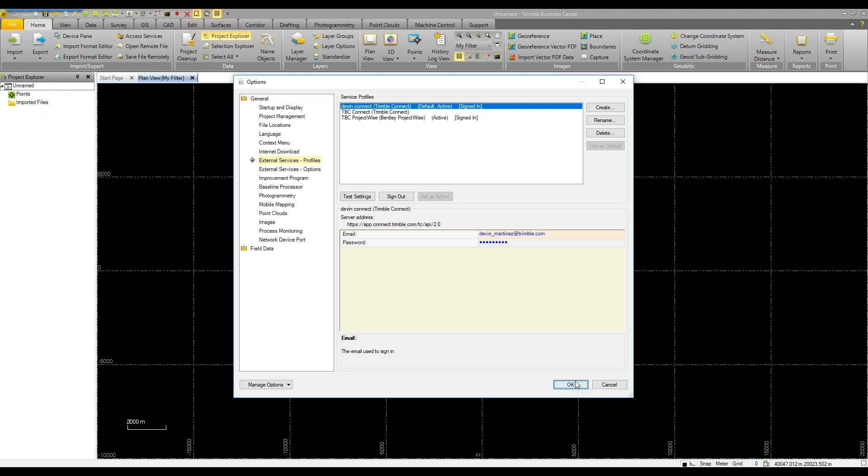Yeah, exactly. All right, so let me, again, sign in. Devin Connect, default, signed in. Let's just go set as active as well. Press OK. And there she is. Perfect. So once I click on this, immediately here's my link. I'm accessing quite literally what's inside of my Trimble Connect.

Where did you get to that command, Devin, again? Can you close it, open it again? Yep, sure. So again, this was up here in the Home tab, Open Remote File, and again, all of your profiles should be stored in here. Here we are, Devin Connect, and again, we're looking at my project structure inside of Trimble Connect.

So we're going to open up a project that we were provided from a Croatian civil engineering company. And this is actually a DWG here. Just quick little tips and tricks: this little ellipsis, if you double click it, it brings you back up in your project tree. So again, we want to go grab that project. If I just double click it, it is opening, and it's pulling it from Trimble Connect right now. And there we are. Again, this file lives inside Trimble Connect, and we just pulled it down.

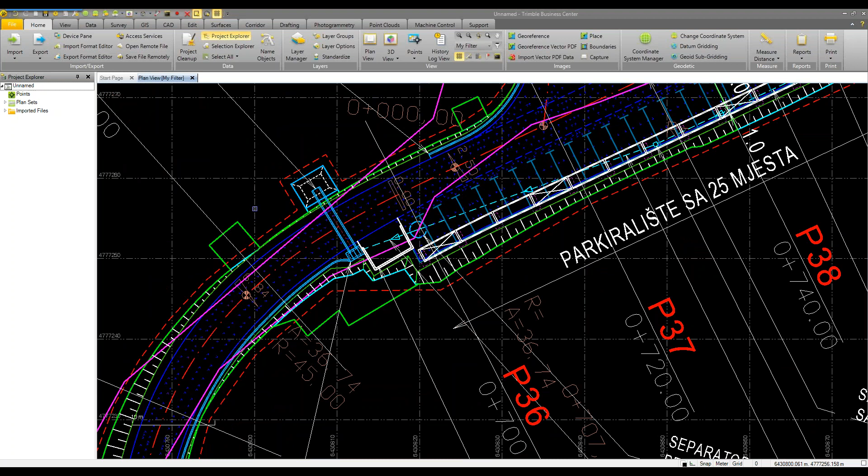So while we're here, the bulk of what we really wanted to take away here is that, yes, this is a two-way street. We can directly interface with web services such as ProjectWise and Trimble Connect, but let's just quickly touch on some of our CAD functionality here, where we're able to automate and create points. Because how this would work is you probably have a drawing on Trimble Connect. You might want to pull that down, create some points, and then sync it right back up to Connect for your surveyors to pull down in the field and begin their layout.

So does Trimble Connect sync with Trimble Access? It does. Via Access Sync, it syncs directly with Trimble Connect, and your field personnel are able to pull your points or anything that you have synced up there, whether that's a DXF, a DWG, or a CSV. So what we're going to do is strive to create some points for the center line.

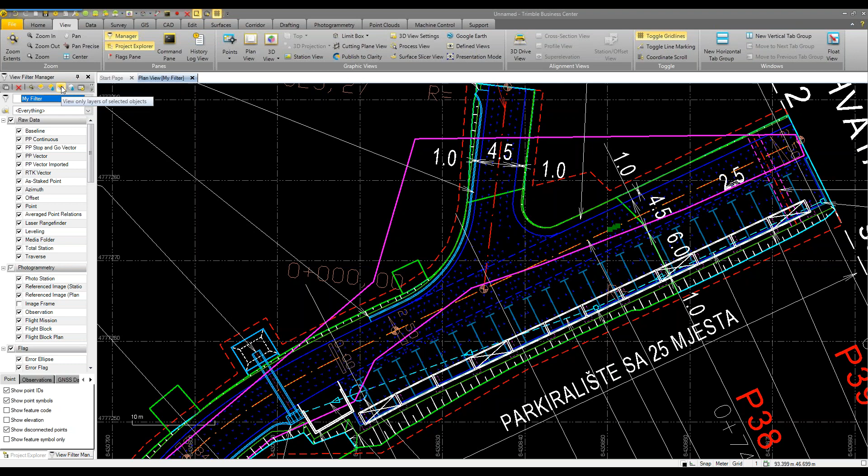Let's go to View, and I want to pull up my View Filter Manager here. There's some really cool, they're not the most obvious icons, but some really cool icons up here, and I would encourage you to give these a play. But you guys can see how busy this drawing is.

Well, I can isolate this center line by simply selecting that center line and selecting this icon right here, View Only Layers of the selected object. Boom. And it just hid everything else by a single click. So no need to go through your View Filter Manager, turning things off one by one by one.

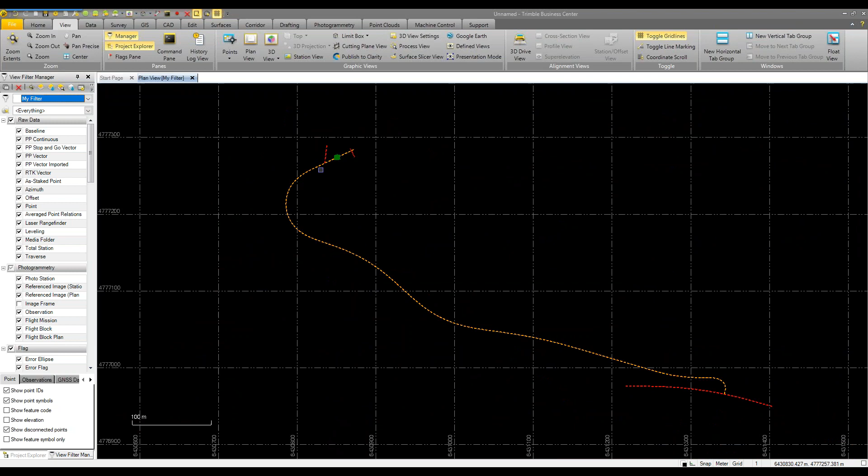All right, and again, as I had alluded to a little earlier, and actually Riley had talked about this, was this creating point. Well, if you do this little drop down, this highlights all of the snaps or create point functionality that we actually have in TBC, and there's quite a few here. I mean, you're able to create points really any way that you would ever need to.

So, for instance, let's do maybe an intersection of lines. Okay, so it's asking me to identify line 1 and line 2. So maybe we want to do the intersection of these two center lines. And this would be this line. And feature code, let's just do center line road and add.

And let me make sure that the layer is turned on. So that little yellow icon notification is in layers. It's telling Devin that the points layer is turned off. Which is weird because, oh, let's see. There we go, points, and there she is. All right.

If we wanted to create points, oftentimes you guys are laying out center line of road, you're going to want to do offsets that are actually outside of the road. So your heavy civil guys, dirt workers can come in and start grading it out. So let's create points at an interval along this line. So this is an automated process here where we just define the interval. Let's just say it's 10. I think we're working in meters here.

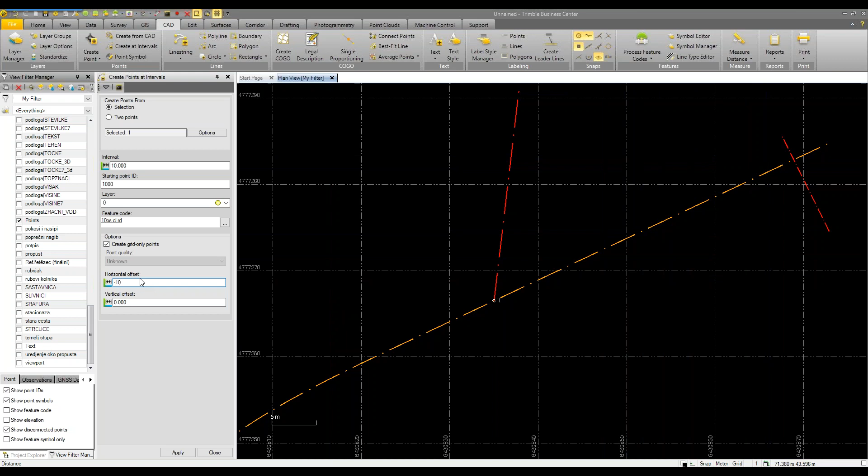I happened to work on this file a little bit earlier, so I know if I did 10, it's going to go to the right side of the screen. Negative 10 is going to go to the exterior, go to the left side. So we'll just go ahead and apply. It was on layer 0, so I just need to turn that on. And there they are. All right.

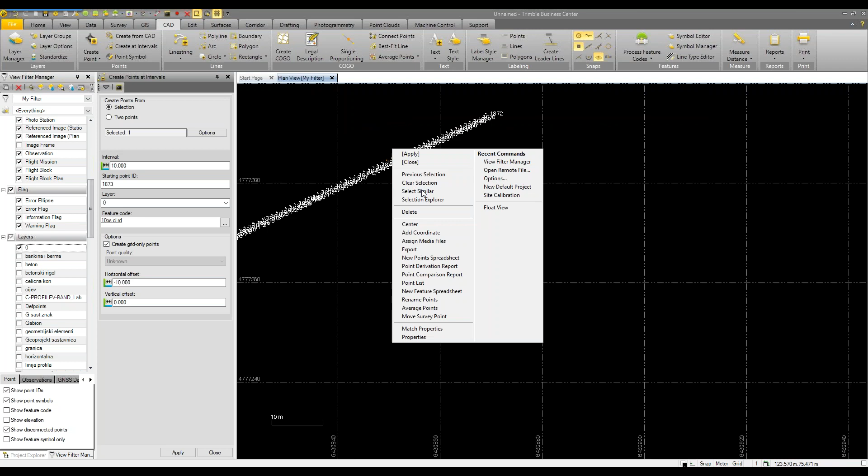So again, I can just select this guy, view only layers of selected objects, and I'll get rid of everything else because I want to kick these out to Trimble Connect. Okay. So you can see I have a point selected here. I can right click and select similar. That'll select all of my points for me. That's selecting a similar layer. And now let's go to the export in the home tab.

Oh, I'm expecting, yeah. Terry messed me up earlier. That was interesting. Jacked me up. I like having them separate, but to each their own. It's funny, this big screen, and I'm like staring over here, like, where is that?

All right, so here, this is a point file that we want to export. So I'm going to go to custom. These will be in point northing easting elevation. It says I've got 873 points selected. Let's just call this centerline road. Centerline road, CSV. And you see this little icon right here. This says browse external service locations.

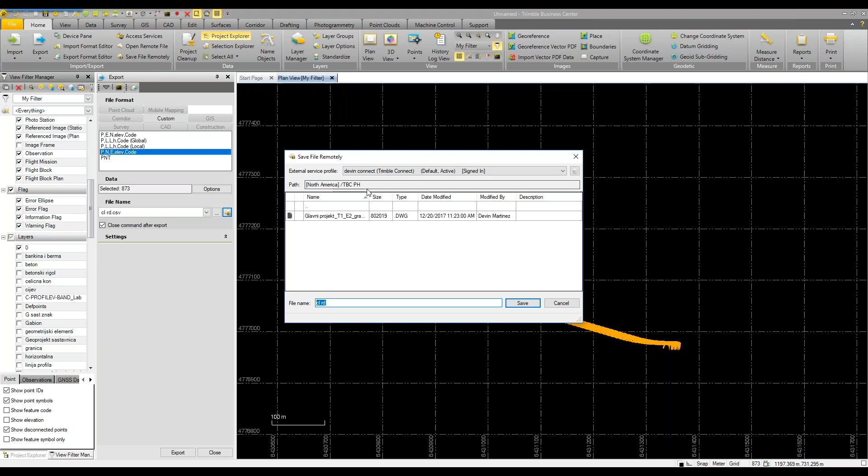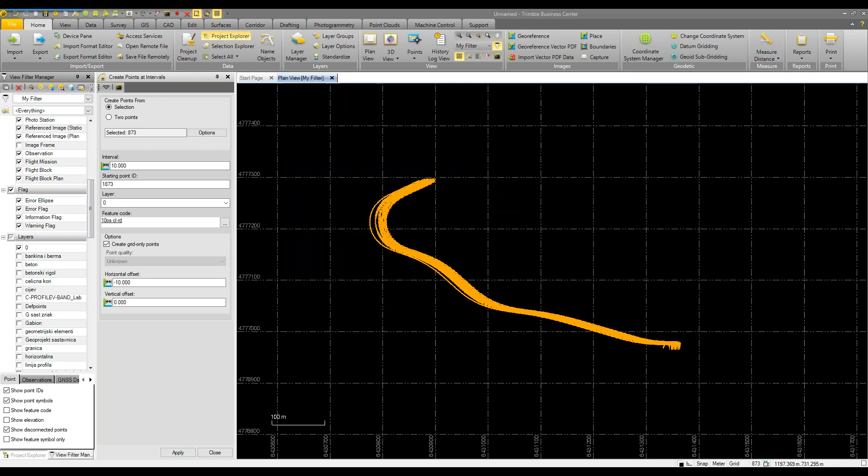And it takes me back to this familiar screen here where we define where we want to go, exterior of TBC. So we're going to write to Devin's Trimble Connect. We're in that same path in that TBC PH folder, file name Centerline Road, and I'm going to just save it and make sure you press export. Now this is kicking out that CSV up to Trimble Connect, and just to verify, I've got my Trimble Connect pulled up somewhere here. Take a look here at my Trimble Connect.

Yeah, crossing my fingers. And as expected, there's our centerline road CSV. So that's our communication back and forth.

So simply to summarize, essentially what we're able to do now is Trimble Connect is, let's think of this as the hub, right? This is the brain, the nerve center, and everything you put in here can go out to Trimble or TBC, and then we can go back from TBC back to the nerve center, Trimble Connect, and then go out to the field. So that's where the name came from, Trimble Connect. I don't think we have quite the backstory for that, but this is connecting quite literally the field to the office.

Yeah, I would use the Google Drive analogy, right? Where Trimble Connect is our hub, as Devin explained, where it's not essentially a product that we would necessarily sell from a geospatial perspective, but we are leveraging the backbone of that Connect platform to exchange data with other trades or with our field personnel.